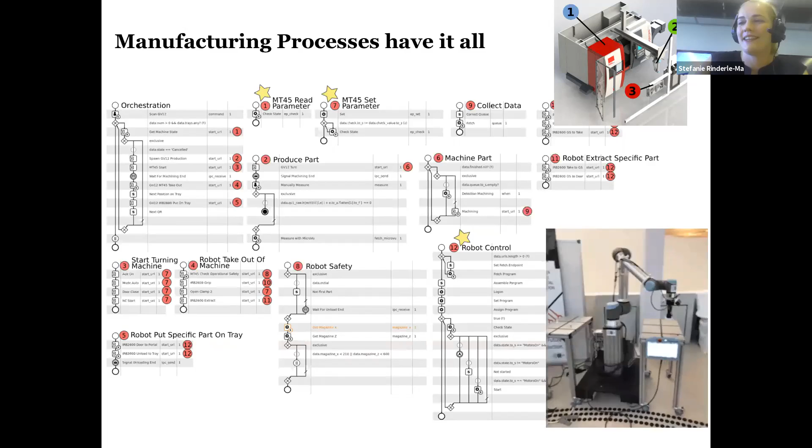So let me start with a real world case to illustrate what we mean by manufacturing processes. This first scenario is a robot that interacts with a machine. These are real world robots and machines. They are situated at the so-called pilot factory, a factory located here in Vienna. And we can use and play around with this factory as scientific partner of the Austrian Center for Digital Production. But it's real world because you can also produce real world parts here.

And what you can see here on the left-hand side is the process, which is then driving the robot interacting with the machine. So let me start the video.

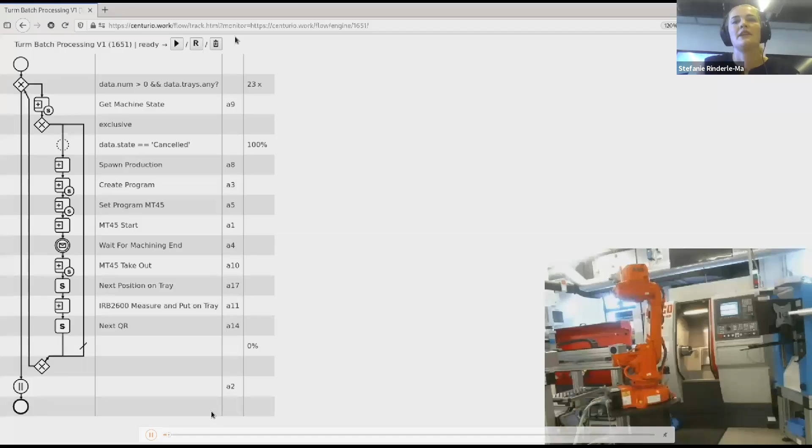So as I said before, you can see on the left-hand side the process. That's, let's say, the super process that drives the entire interaction. And now you can already see by the animation, so it's not only animation, it's already execution, that different tasks are executed and sub-processes of the super process are spawned.

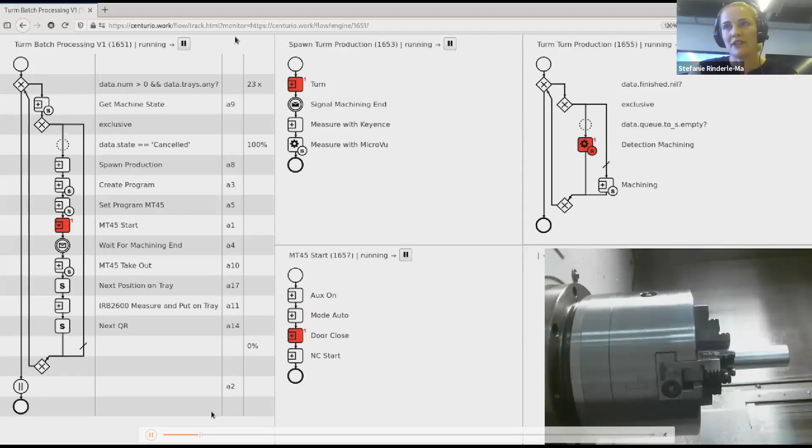And on the right bottom, you can see the machine with the workpiece. What we actually want to produce is a chess tower. So you can see now the raw material, and the process is really driving now the machine. So it starts to turn, and we can see that already the processing of the parts starts.

So in the first step, there's more raw processing where you cut the raw shape of the tower, which we can see here. And in the process, you can see, okay, the super process is in a state wait for machining to end. And the sub process is active. So the turning of the machine is executed here. So you can see how the shape of this tower develops.

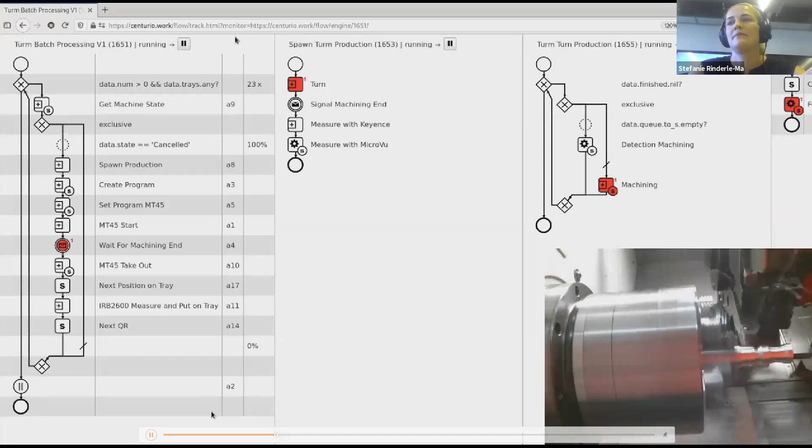And we took here also some little pauses and slower movements to see everything and to also see what is happening in the process. Okay. So now the more fine-grained processing of the tower starts. And I'm really fascinated by this because this is how really something is happening here.

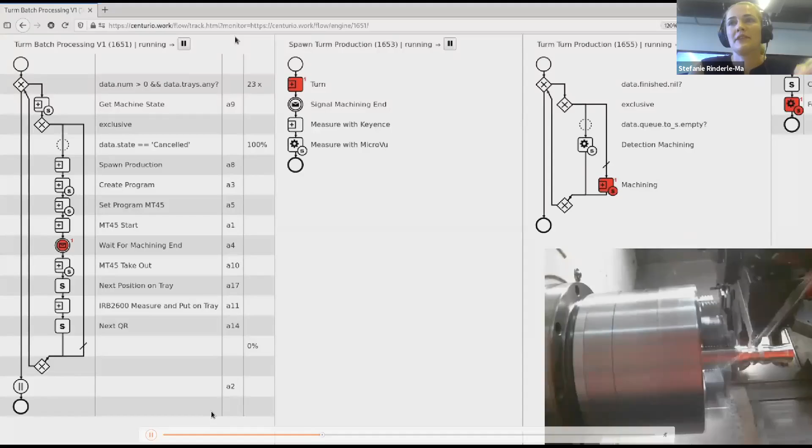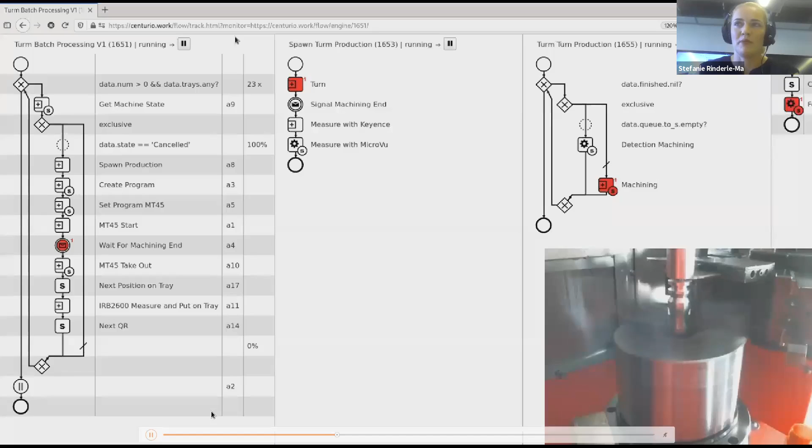And what we have to do is that from the process, of course, we have to connect to the machine. And this also, for example, is a lot of work in implementing all these protocols, how you can really access the machines. For example, there are standard protocols like OPC-UA, but of course you have to manage to connect really these physical devices to the process.

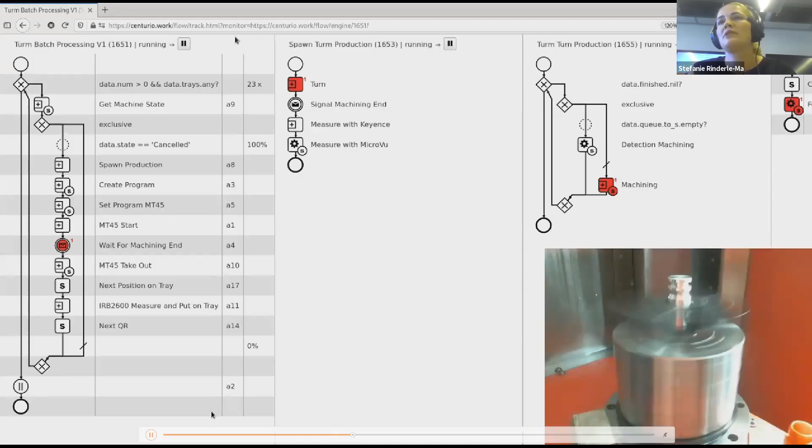Here it's a different view now, it's from the top, so that we can see better what happens. And now the tower is already cut, and roughly at this stage, it's finished. So you can see these machining sub-processes stopped now and disappeared because they were completed.

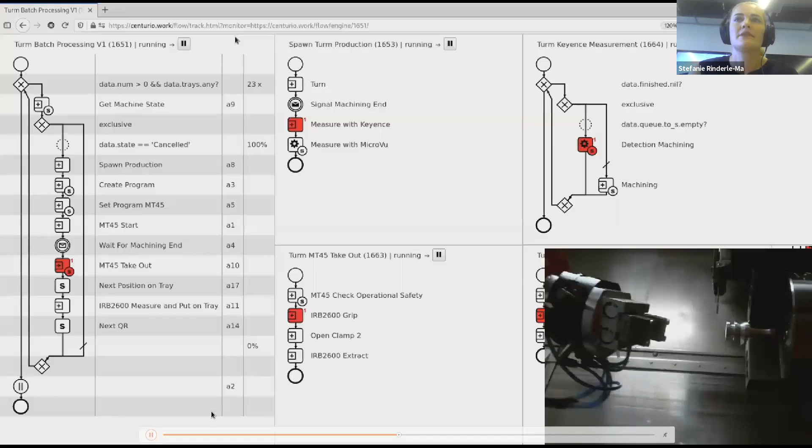And now there are two measurement steps in this process. So for quality control, we not only have to produce the part, but also we have to see whether or not the quality is sufficient. And there's two ways here to measure the tower that we have produced. One is with scanning the part. This is the first one here, measure with Keyence.

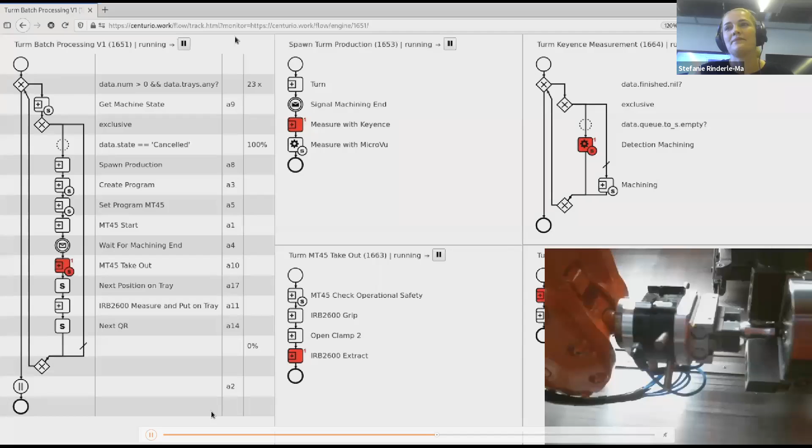And for measuring the part, the robot has to take out the part from the machine. So this is now one of the sub-processes here, the lower one where we can see take out, and now the gripping of the part. And it's a little bit slower than in reality so that we can see everything happening again. And now the extraction starts. Yes, now we see the extraction.

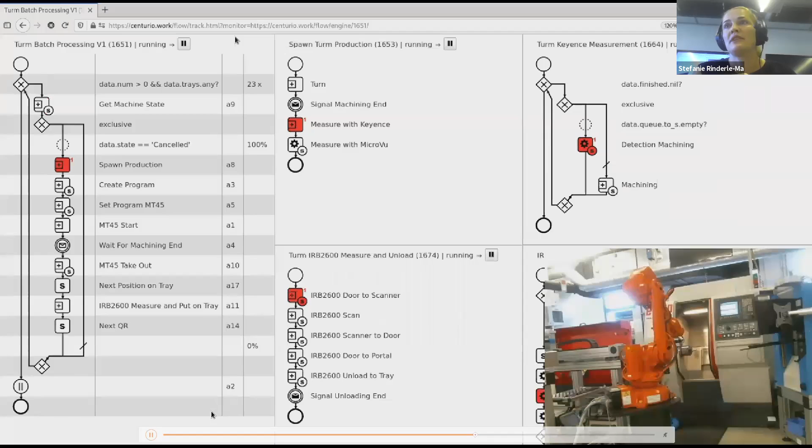And what is a very important point is that during all these steps, let's say the machining before, taking out the part, and now the measuring, the process also in parallel collects all the necessary data connected with these tasks. So for the machining, for example, there could be different data interesting, the power consumption of the machine, for example. And then, of course, with the measuring tasks, there's also a lot of interesting data measured.

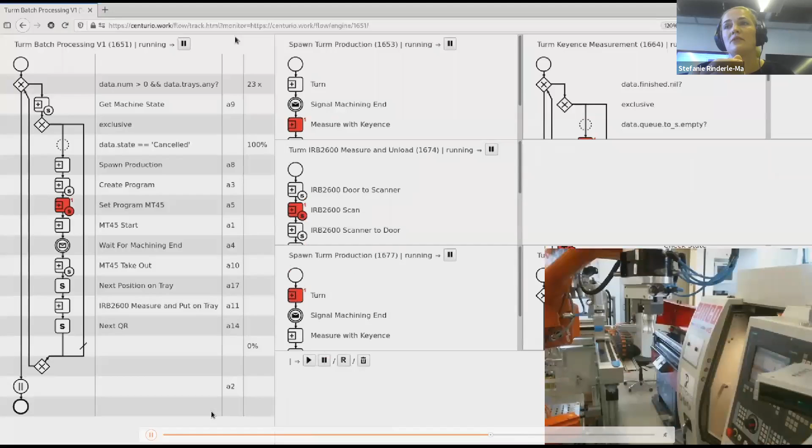So now we can see that the robot puts this into this scanning device. And by this integration by the process, now it becomes possible that all of this data is connected together in a process-oriented way. And that's really new, because so far, if you go to real-world factories, often the data is collected more in an isolated manner, let's say per machine. So they have data silos.

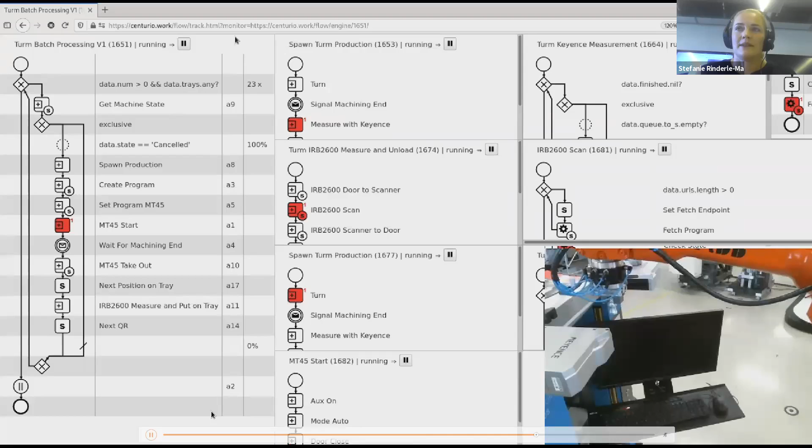Maybe I can measure all the data connected with the production machine. I can measure all the data maybe with the follow-up workstation, but this connection is missing. And I think here an entirely new door opens for data collection and analysis. We can see here now the scanning of the part and so on. Maybe I will go to the end of the video because it takes now some time.

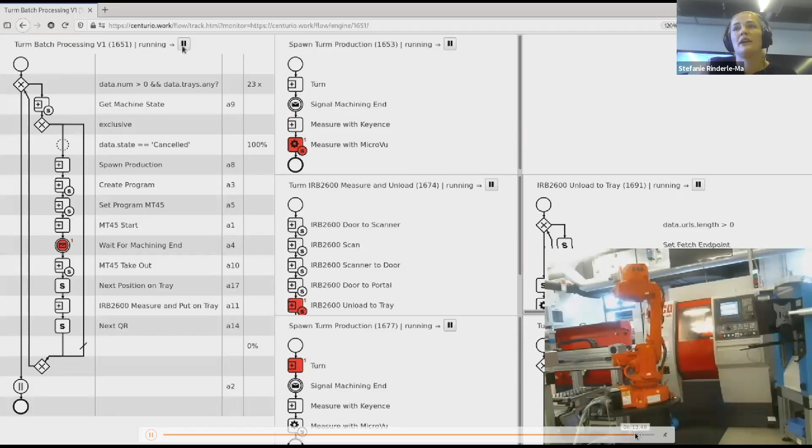So then the second step, the second measuring, would take place here. And as I said before, we then have at the process level the data of both measurements at hand and can, for example, compare both measurements within the process. And then, for example, if we see that there is maybe some problem with the part, we can look back into the data that we have collected with the machining and then see, maybe from sensor data that was collected, that there were already some drifts or something happening in the sensor data.

And this is so interesting. So this is, I think, one of the benefits of such a solution: not only to execute such processes, but this data collection part. And I think this is also a little bit in line with what we heard this morning in the keynote. So we have now the process data, the event-based data, which we can do process mining with, but we also have all this additional data like sensor data and so on, where we can then combine this with, for example, machine learning methods.

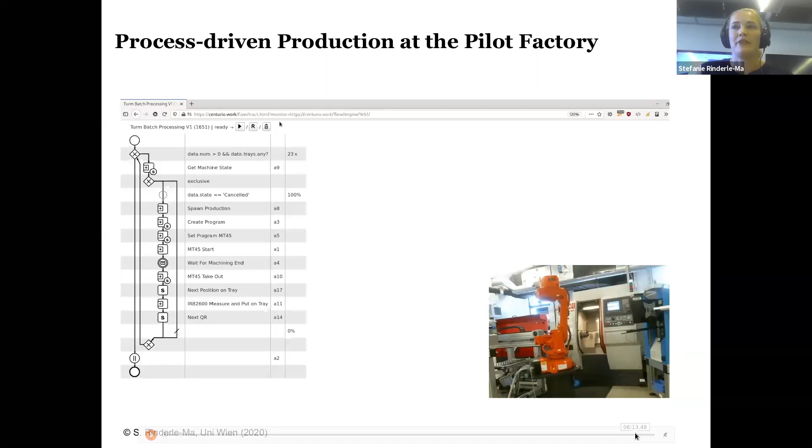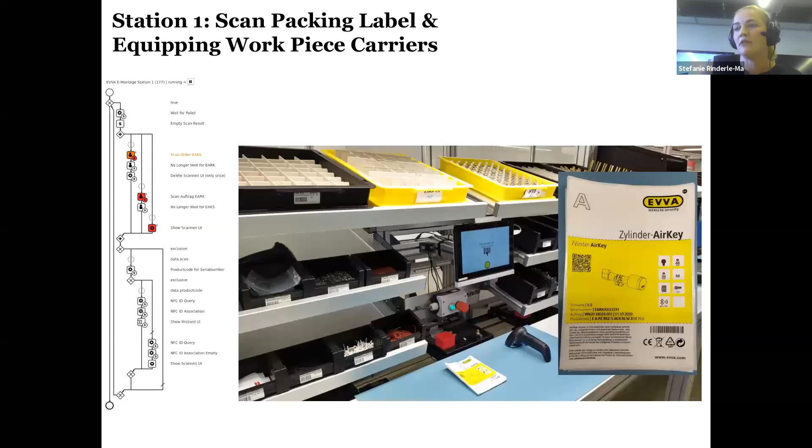And then at the next workstations, and here we can see this inclusion of the human, the process can also be used to give instructions to the workers for the specific task they are doing. You can see here on the user interface, and please keep in mind that we have all these variants, so not all the instructions are the same for this task, but depend on the variant that is currently produced. The workers can be guided by these instructions. And this is a huge benefit because so far they have worked with paper-based documentation. So I don't know how many pages, but it was several hundred pages of documentation that had to be consulted for the steps. And a solution like this is, of course, much more informative and quicker to consult.

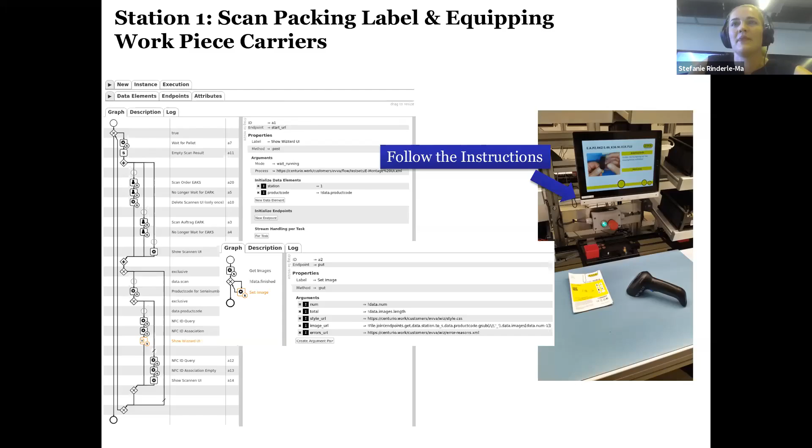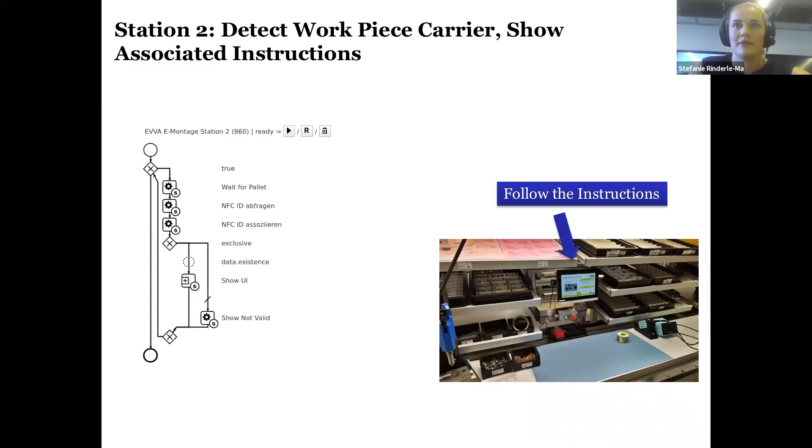This is the next workstation here, where again instructions are presented. And as I said before, first of all, this leads to a reduction, of course, of complexity and effort. And also, as we learned in the current situation of crisis, there's a demand, for example, for companies where staff or teams change more often. And here, of course, new workers that have to be instructed can be more easily integrated into the process as well. Right, so these were two examples: one more on the automated side of the spectrum, and one including human workers.

So are there any questions regarding these two examples at the moment? I think you're fine. Okay, right.

So a first key message, for us looking at this domain now for almost 10 years, is that process technology can really help to drive digitalization for manufacturing processes. I have to say that, of course, production and manufacturing is already a highly digitalized environment. There's a lot going on, what the robots can do and so on and so forth. Where we think processes come into the game is really in this integration part, and also in this data collection and providing new ways of analysis on the production side.

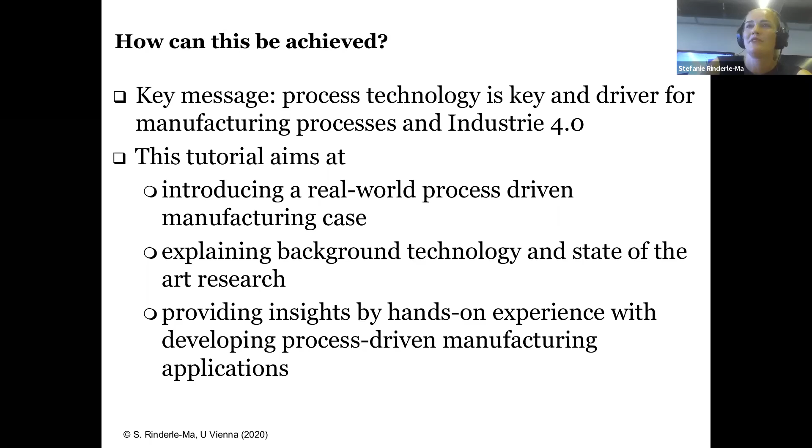So what we have already seen, we have seen two real-world examples for such manufacturing processes, an automated one and one including human workers. In the next slides, I want to introduce a little bit the background technology and state of the art, because it's not only an application-oriented question or research, but it also connects to many, many interesting fundamental research questions. And then in the end, we want to provide some insights by a hands-on experience where we developed the scenario mentioned in the beginning.

So I try to give an overview about the research areas that are necessary to be understood to develop such manufacturing solutions. And I don't claim that this is a comprehensive or complete picture, but these are some of the areas that are touched and where state-of-the-art research is also currently going on. So let's say the outer side, I definitely think that the problem sits at the interface of BPM and IoT, obviously. Then with this data collection and analysis part, we have, of course, questions how to analyze and visualize the data.

Then, as also mentioned by Hajo in the beginning, I'm always interested in change and adaptation of processes. And this is also really necessary in this domain because exceptions can happen at any time. And where currently in some situations there is one expert listening to the machine and hears maybe that there might be a problem at some certain time coming up, we think it would be more structured and more sustainable to analyze the process and maybe predict this problem from the data that we have, and then also be able to suggest and apply adaptations and repair actions.

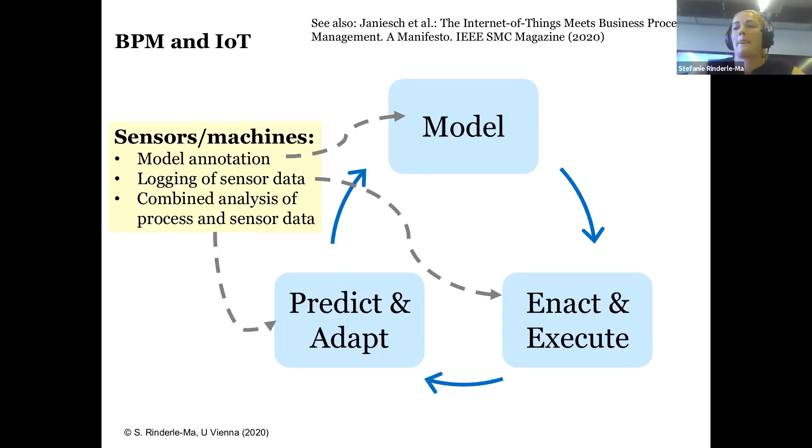And then this, of course, plays into the execution part where the sensor data is actually collected. And then in the prediction and adaptation phase, how we can analyze both the process and the sensor data in combination. Then humans, also a very important factor here. With the modeling part, we could, for example, think about, do we have manual or automatic tasks? Then what is also from our experience in practice a huge topic is worker assistance. So in the one example from EVVA, we have seen that this guidance or instructions are really helpful

and necessary in practice. And then if we think about adaptations of processes, we not only have to make sure that adaptations are correctly applied, but also we have to support users in defining the adaptations. And this is often also a huge challenge because maybe the expert can hear that the machine will run into some not so great state, but what to do to the process afterwards is maybe another question. So here we talk about support of domain experts, who are not necessarily the same as the process experts. So it would be also nice to see from the data, from the prediction, what kind of process evolution or adaptation will be necessary afterwards.

It is nice, Steffi, that this is also a human in the loop aspect, of course. Yes, yes. And I had this before the keynote already on slides.

It was no ad hoc adaptation afterwards, so I think it's a really important aspect. It's important that we talk about it, because one of the fears connected with introducing these processes is that all the work will be automated and there will be no work left for human workers. So I think it's important to say the work may change a bit, but the main goal is support at this stage, for acceptance. This is very essential, because if you have hurdles where people in the organization don't want process management, that's a bad start right away.

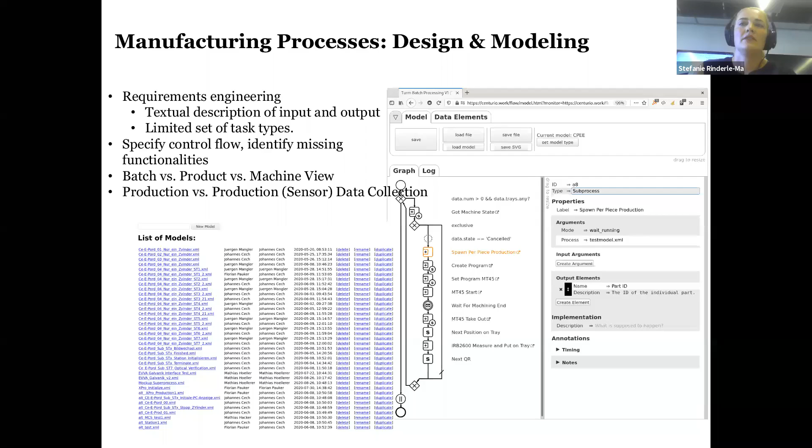So what we have seen is the manufacturing process design. I want to distinguish between two phases in the design. One is the modeling. Here we want to offer users, along their mental map, standard modeling notations like BPMN. You can see the interface of the solution we developed - you can model along BPMN, or import BPMN models you've already made. You also have a repository of models you may have specified before and just want to adapt and use later. Then all these other questions come into place, like where are tasks where I can use sensor data.

The second phase is the execution design, because we have to be aware that the models are becoming programs that are executed. So it's definitely not no-code, but let's say low-code plus this model-based approach that we use here.

But there's no free lunch, let's say. If we have modeled the process, we also have to define, for example, how to connect the machines, how to connect the sensors. Here we have to deal with all these protocols I've mentioned before. But we also have to see what happens if there's no response from the machine, or only a partial response - how to handle problems and so on. This is, I think, a very structured and usable approach towards having a really executable program. But this information has to be provided at some place to be able to execute something.

What can be offered here is step-by-step testing. We can use, for example, testing or dummy services, so you can see how the process executes before you really connect the machines and sensors and something is actually done. This is, let's say, beyond model checking and simulation. This test mode can be interesting before you go to the real world and use, I don't know, the one million dollar material or something.

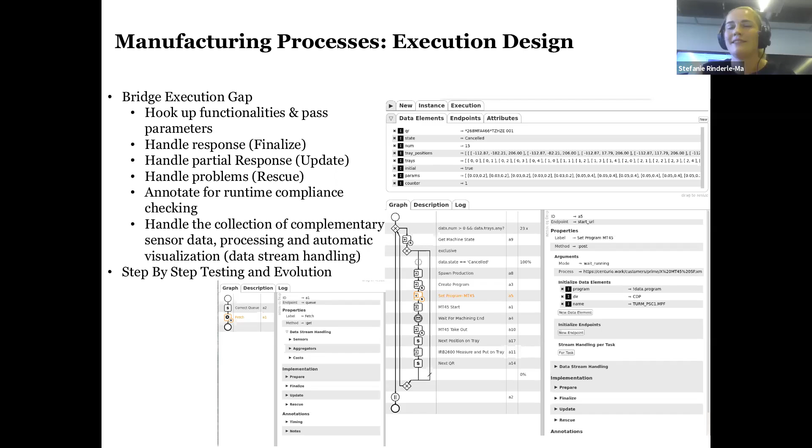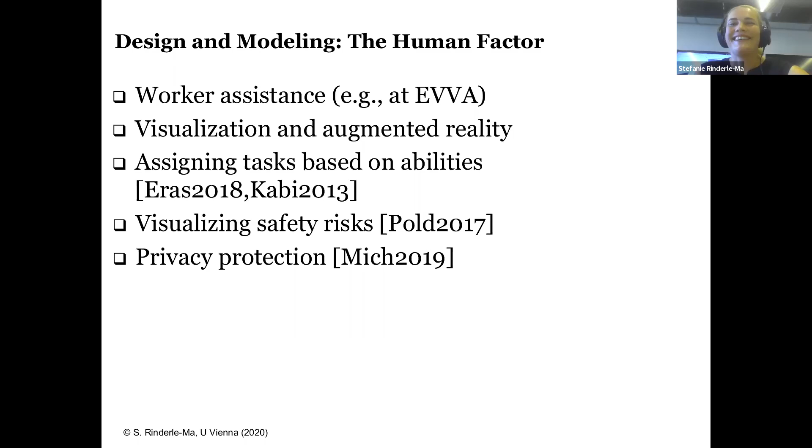Then what's also a huge issue in manufacturing is safety, because a robot, if it's programmed to do something, it will do it regardless of whether there's an arm or a leg in between. So safety is really a huge issue. For users working with the process, we could also use it to visualize safety risks, for example. Privacy is also a concern, and there's ongoing work here. So people are thinking about design, and this human-centered design of manufacturing processes - there's still many things to do in this direction.

Yeah, the second part is the part which I also regard as highly interesting. The keynote this morning was also about process data used for process mining and sensor data, then maybe more with the machine learning approaches. I think here is one of these exciting areas where you can really have both of this data to be analyzed.

Hayo, you wanted to ask something? No? Okay, sorry, I was checking whether there were questions and then I pushed something. Okay, sorry, yeah, it was.

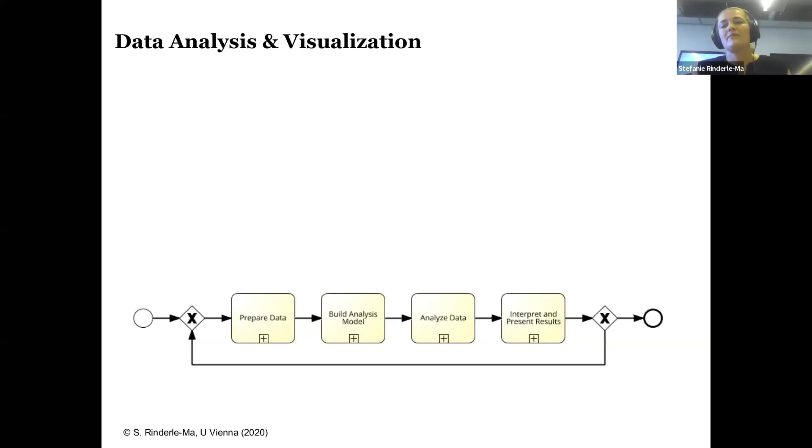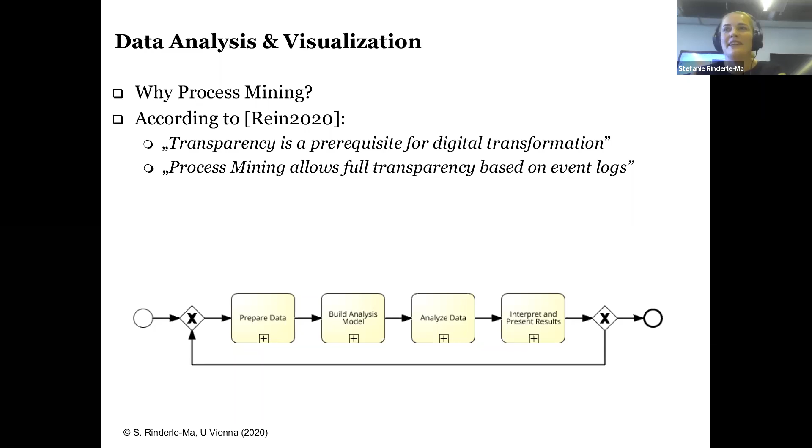Right, let me go a little bit deeper into this. For the data analysis and visualization part, I think this was also a question nicely referred to in this morning's keynote: what does process mining do? In a very recent book on process mining in practice, I found two statements I can really relate to. We talk about digital transformation, and it's stated that transparency is a prerequisite for digital transformation, and that process mining is the enabler of having full transparency on the event logs. I think this is quite true. Process mining in general is also very interesting for the manufacturing domain. I don't want to go into process mining here, there are textbooks, as Avi said this morning as well. But what I want to comment on is the combination of process mining with sensor data.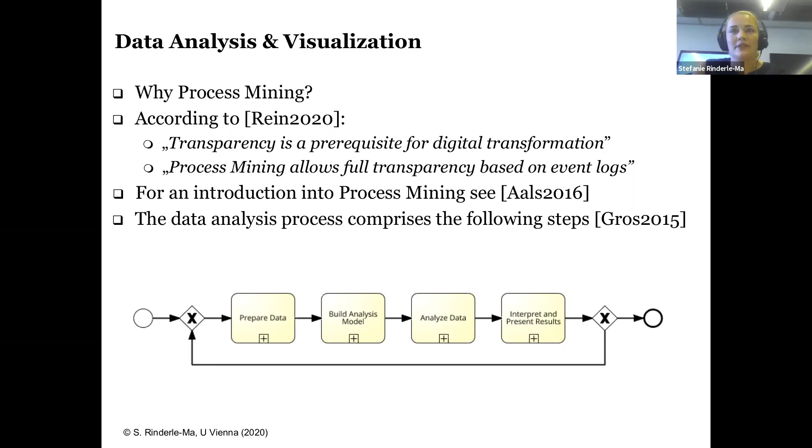Let me first go into the data part. In an analysis project, first, and this is often the most expensive part of such a project, you have to find, collect, and prepare the data. It's a very good question how to bring together the process data with the sensor data.

For the process data, we have questions. Okay, we have event-based data, sure, but then a question is: what about the lifecycle? What lifecycle states do you support in collecting the event data? When you look at logs, sometimes there's a completion event, but for interacting with machines, sometimes it would be better to also have a corresponding start event, because sometimes the machine gets stuck somewhere within the execution, and then you won't have a completion event. It would be good to have the start event to relate to this too. Even more lifecycle events would be even better. So this is one claim we would make: that you collect your process data with a sufficient distinction of lifecycle states.

Then sensor machine data is highly interesting, and this is often collected in the form of time series data. So we have, let's say, temperature or pressure, or we can also have power consumption, which is then measured continuously over time. Then the question is how to bring this together with the event data.

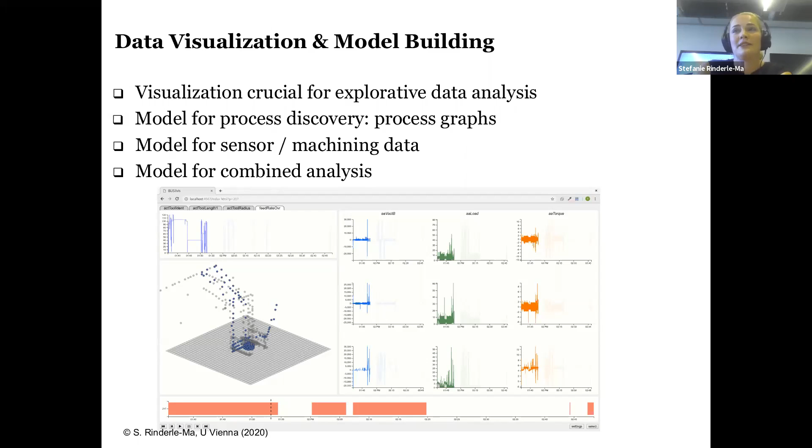Still, I think it's also interesting to look a little bit more into models to visualize both the process data and the sensor data. This is also hand in hand with how to collect the data, but the visualization might be even more interesting. So if you have multiple time series per task, how can you do that in an informative way.

And then, commenting on the analysis: what we actually want to do now is use process mining, but include data. This is no new idea - this has been followed for many years, the general question of how to include data in process mining. For example, there was all this work on decision discovery, where based on process data, you want to discover the rules behind decisions, alternative branchings in the process. Or if you look at conformance checking, there's also work on taking several perspectives, including the data perspective, into account.

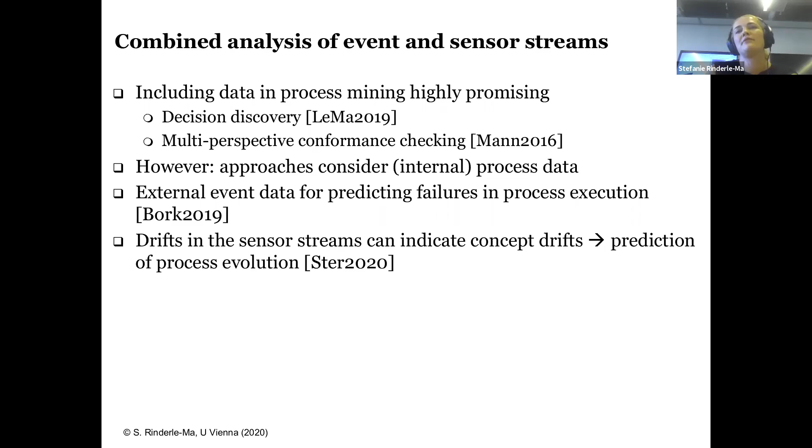Mostly these approaches consider more the internal process data, if I might call it like this. External process data has started to be considered - for example, there's some work where external data is used for predicting failures in process executions. We want to move, because the experts say this would be really interesting, towards explaining drifts in the process execution by drifts that we observe in the sensor streams. And of course, one of the problems is to select the right sensors that really explain the behavior, and there are many other questions here.

And also for conformance checking, this could be interesting, because we could base the costs of deviations, which conformance checking takes into consideration, also on the data that we observe.

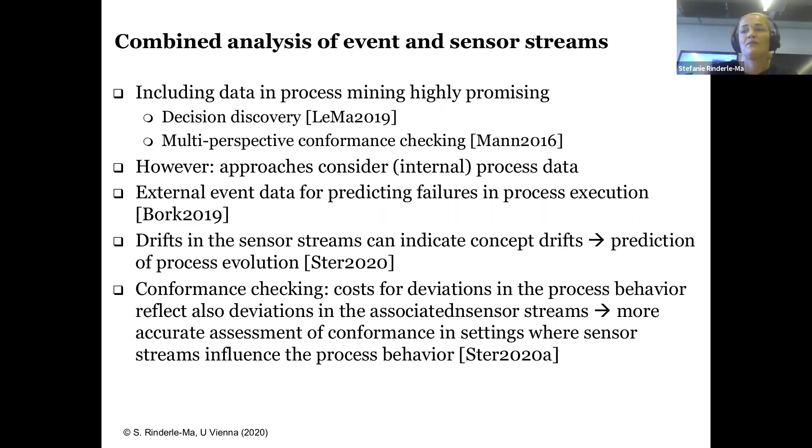And then finally, let me comment a little bit on runtime adaptation and repair. There's a whole body of work on process change. There are also books on it. So this has been a very relevant line of research for many years now. I think it has also gained some momentum nowadays again, because all of our processes were very disruptively changed recently.

The line of research has dealt with many aspects. I think one of the prominent ones was that you cannot conduct change however and whenever you want, but you have to deal with correctness issues to not run into problems afterwards. And there were also first works to deal with how you can find the right change for, let's say, an exceptional situation.

And we also observe this in the manufacturing domain. There can always be errors due to many sources, many reasons. There can be errors right away, something is going wrong. And there could also be, for example, rare cases. This is of course not really an error, but it also might lead to something that you won't expect. And for different reasons, you would want to modify the process, even during its runtime. I think this is so important to mention.

You can, of course, also go and model a new process and start it over again, but often this is not possible. So changing a process is changing a running program, and this has to be done carefully. What would be good is to at least be able to start and stop instances whenever it has to take place, but also, for example, change the thread of control, skip some steps, or even insert some tasks. All of these operations are really important, but have to be handled with care to avoid any side effects afterwards.

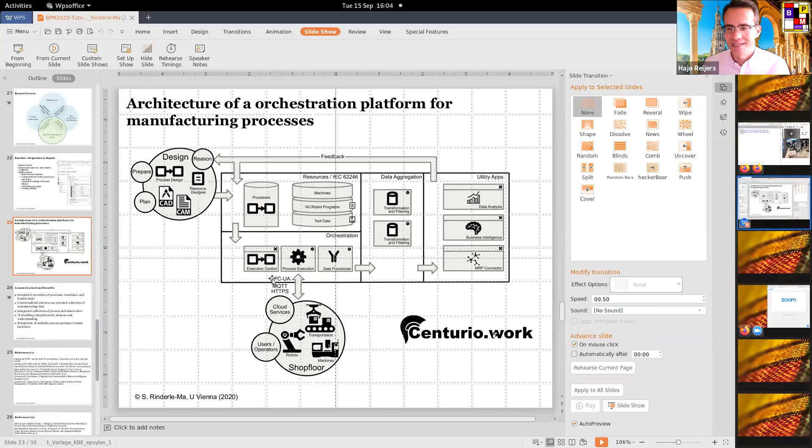By the way, maybe it's a good time to give Felix the opportunity. Felix, one moment. Now it's perfect. It's gone. Can you speak now, Stefanie, to make sure that we can hear you? Is it better? Yes, there is no background noise. We hear you very faintly. Better? Yes, perfect. Thank you so much. I have very capable team members. Very good. I'm going to give Felix the opportunity to ask you a question. Go ahead, Felix. Can you hear me? Yes, I can hear you.

Very good. Thanks for the nice introduction to process support for manufacturing. I wonder, and maybe I missed this because it's quite warm here where I am, how data quality plays into this, because my experience doing some projects in the manufacturing domain was that we always tried to do some analysis, and it turned out you cannot really use any of the stuff that they record.

Yes, very good point. I think I very implicitly touched upon this by saying that the data preparation part is the most expensive one of most of these projects, because as you say, you can start doing something and then in the end you can throw away everything because the data quality is so low.

So I experienced this very much in the medical domain, for example, where we had even handwritten logs or Excel sheets which were called a database and so on and so forth, particularly if you have heterogeneous data sources and have to bring everything together.

So for the manufacturing domain, what I presented now is that we already collect the data in the way we want to collect it, because we drive this with the process engine and we run all the processes ourselves and provide the opportunity to collect the data in a contextualized way in the quality that we want to achieve. But I totally agree, data quality is a huge problem. And as I said before, in the medical domain, we even had to go all the way to recollect the data. So it was not usable at this point.

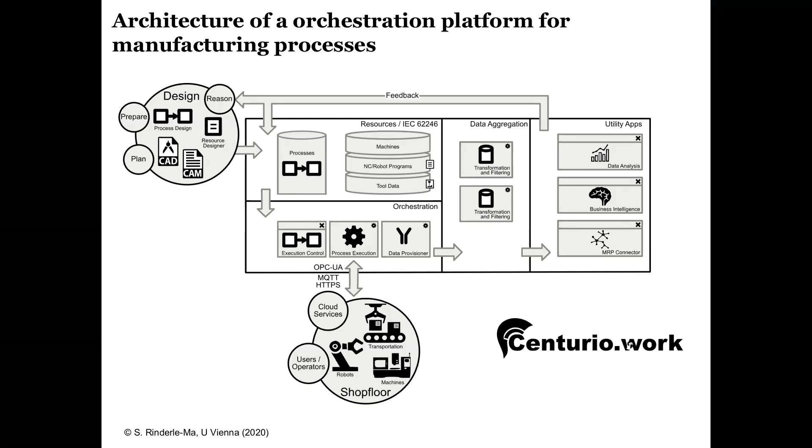Yeah, thanks. I just wondered. Sure, yeah. Very good. Thank you. So I'd say in the interest of time, okay. Proceed. Okay, great. Thank you very much for the very nice questions.

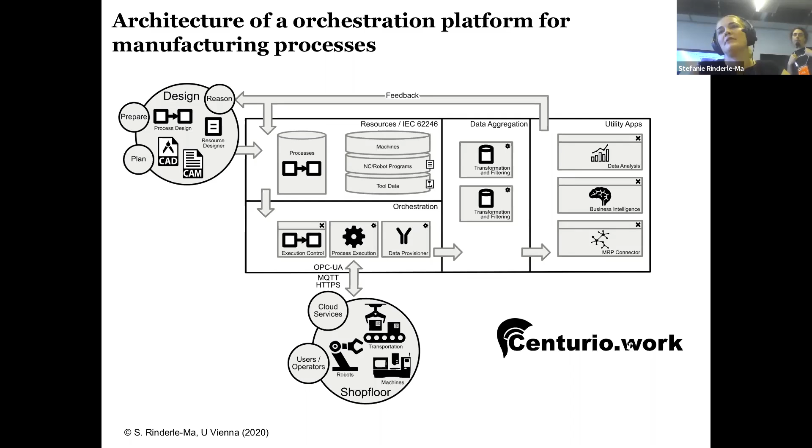Then this would be an architecture for such a system. And maybe what is interesting is the design part. You not only have the process designs, but you have also the designs for the products, so all these technical drawings, which you have to also consider. And at the runtime part, you have these connections to the physical devices via protocols, OPC UA and MQTT. And then of course this data part, which we will now also comment on in the demo.

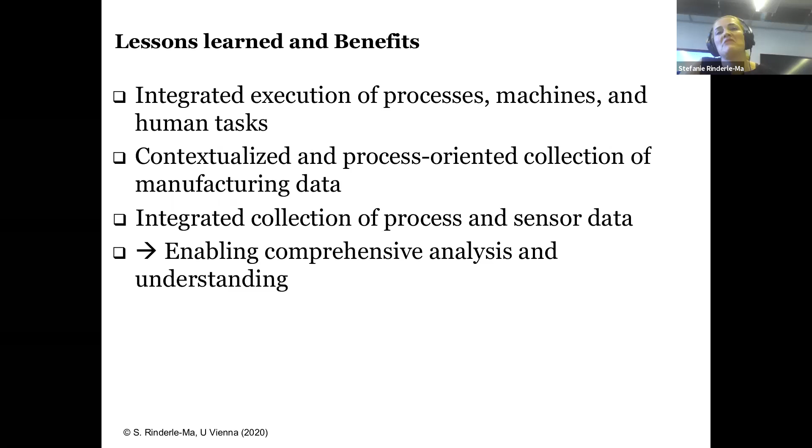So maybe I just summarize at this moment the lessons learned and benefits before going into the hands-on session, so that we don't miss this. What I think is the great thing about the manufacturing domain is that we have the integrated execution of everything: processes, machines, human tasks, information systems, and so on. And the huge benefit of implementing a process-oriented solution is that you can collect the manufacturing data already in a contextualized and process-oriented way. This enables the integrated collection of process and sensor data, and in turn a more comprehensive analysis and the transparency that we talked about in the beginning, which is such an important aspect of digitalization.

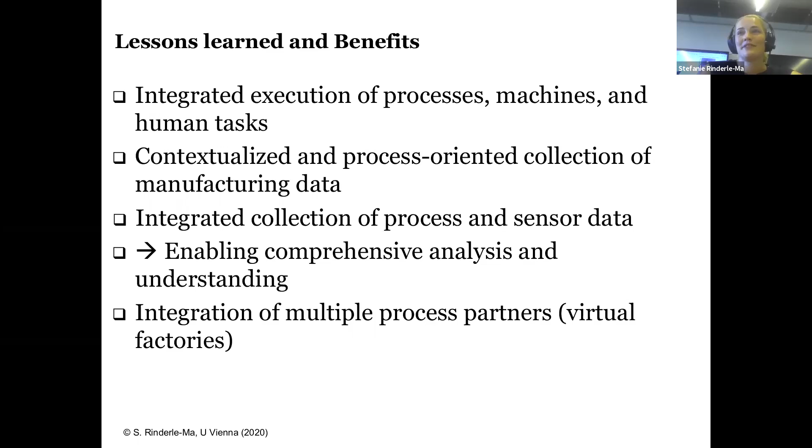And as a more future point, which is always a huge selling factor for project funding, is that you want to go outside your company. So with processes, you can also form process networks with multiple partners, under the buzzword of virtual factories. We had an entire EU project on this. But in reality, we are not yet there, but I think we have to keep this in mind, because this is a very interesting way to go.

There are some references and of course some thanks. So Jürgen will now do the demo and show the hands-on experience, and Florian is working with EFA and provided these nice slides on the use case at the EFA company. Right, now let's go into the scenario and we will start with a demo.

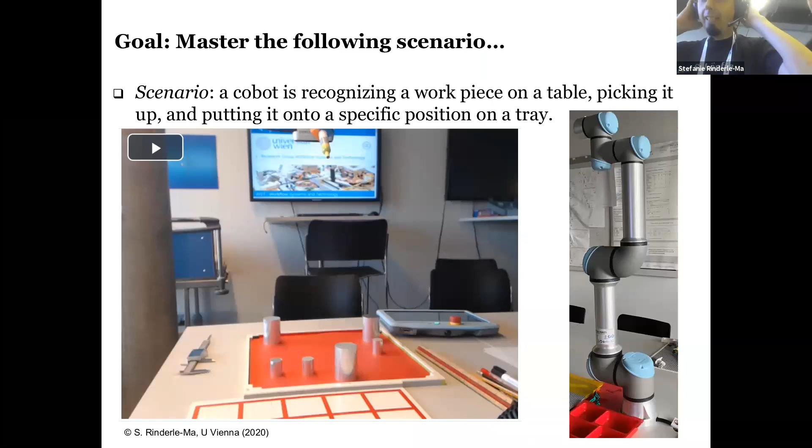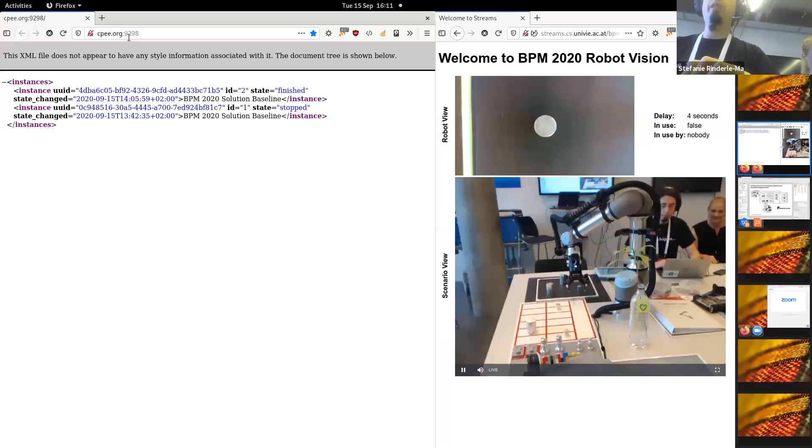I switched to the other view that you can see here. For today's demo scenario, we will use the robot in our lab. You should now see on the right-hand side two different camera streams; the robot view is the upper camera stream. The camera stream has a delay of about 4 seconds because we have to take the picture and internally work on it, for example, analyze it by neural networks. So there is a little bit of a delay.

So when I put my hand below the camera, you can see me move away from the stream in the Zoom, and about 4 seconds later, you should see my hand appear under the camera. You can also see the total view of the lab on the lower end. So you can see myself and Stephanie, but a little bit later because of the camera delay. And here is the setting.

This is a Universal Robot 5; the 5 stands for the fact that it can handle up to 5 kilograms. If it's stretched out, it's about 1.5 meters wide. This is the control panel of the robot, where you can typically do all the programming. And the scenario, as you see it here, is basically a work organization scenario.

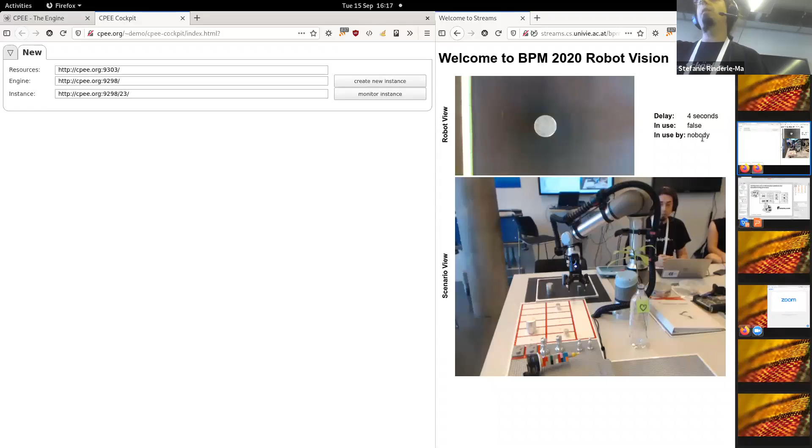So as potentially many people in this online meeting will now use the robot, I put in this view so that we can see who actually currently uses the robot, and we have this rule engine hooked up to the process engine, which actually protects the robot from being used by multiple sources. So you can always see, if you give the process instance your own name, which person actually currently uses the robot, so that we can cheer for him or whatever we do when he does something good or bad with the robot.

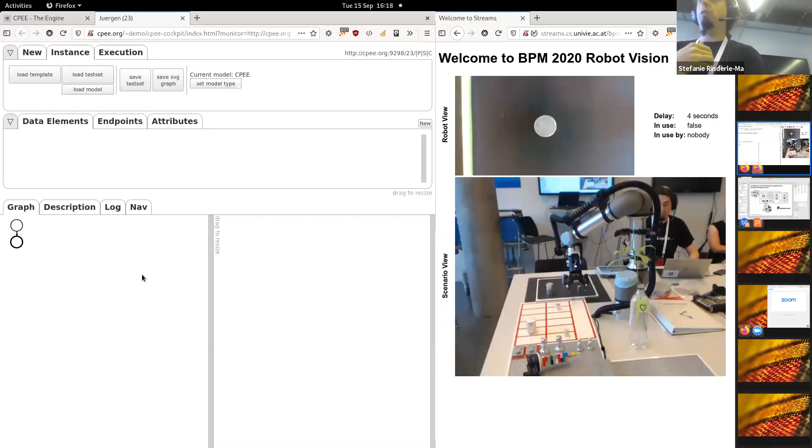Okay. So I created this instance number 23, which you can still see up here, and you come into our modeling view. In contrast to, for example, Signavio, we are not using a manual layout, but this is an automatic layout editor, which we use because of feedback by our customers. There is a strong desire that when two people model the same thing, the result actually looks the same. And also we can do funny reformatting of the processes in the automatic layout format, so that it's easier for bigger groups of people to work on the same processes.

So for the first step, I'm using this load template button. I can make it a little bit bigger if you want. So the general layout is, we have this new that we were before. We have this instance where you can see operations that you can do on the instance. You can, by the way, import Signavio models if you want, but of course there is always, after the modeling, the execution gap where you have to add in certain things so that it becomes executable. There's this execution tab where you can start the execution.

And then we have data elements, endpoints, and attributes. In the attributes, you can see in the info my name. Here you can change your name so that it shows up over here when we execute. And we have some other information like the model type and the theme and stuff like that. Currently, we don't have many endpoints to use. Currently, we don't have any data elements.

So I'm now loading the BPM 2020 template. On the surface, nothing changed, but we now have a whole lot of endpoints which are connected to the robot. So it's a total of about 11 endpoints, and these can be used to talk to the robot. Another thing that you can see here under attributes is that we have another attribute which is called resource, and here it says UR51 because we have two Universal Robots and they are identified as UR51 and UR52. This resource attribute actually helps the rule engine protect this instance.

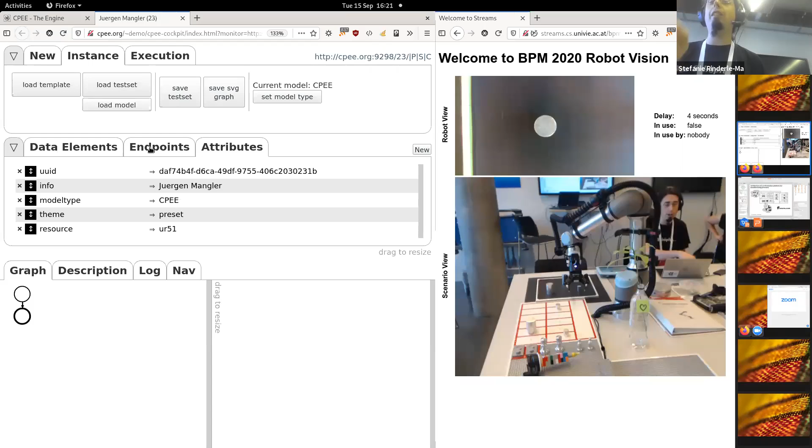If a single instance has this annotation, only one of these instances which has this resource UR51 in it can run. So don't play with this one, leave it in, or else two people can start the robot simultaneously, which will lead to interesting behavior.

The robot itself operates on a proprietary protocol, which we encapsulate by a protocol called OPC UA, which is widely hyped and available in the industrial realm. And for the purpose of this demonstration, I wrapped all these OPC UA calls into these REST service calls, which can be used here in the process.

So the first step, as you can see in this picture, we are now looking at an individual little piece that I put on this black paper. I move it away a little bit. So the first step of the modeling is that we want to insert a task where we move into some kind of overview position, where we can see the big picture and actually determine if there are any parts on the workspace. So the manual modeling works like this.

You start with a start and an end symbol, a BPMN start and an end symbol, and you insert at this position certain things that you know from BPMN. So it's not possible here to produce any models which are not valid, so they are always syntactically correct. Of course, the semantics is the problem and not the syntax, but here everything that you produce is syntactically correct,

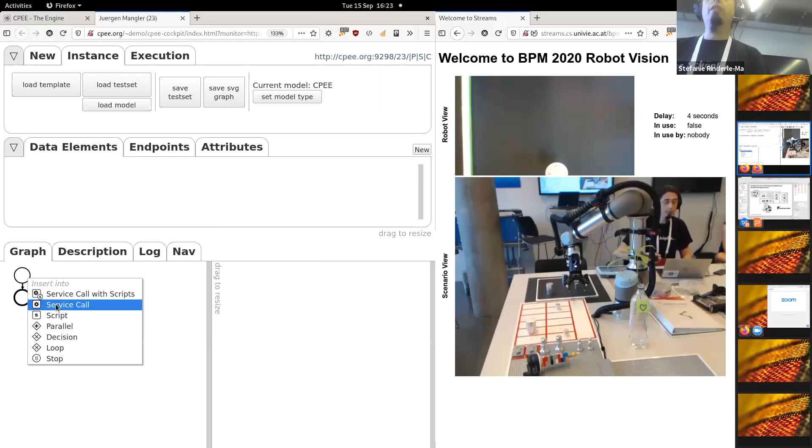and there is service call with scripts and service call. The one is just call an endpoint, and the other one is call an endpoint and work on the return value. So for simplicity, we just introduce a service call. Remember, we are in the instance number 23. We have a quick look at the endpoints, and we have our simplified editor with no fancy bells and whistles.

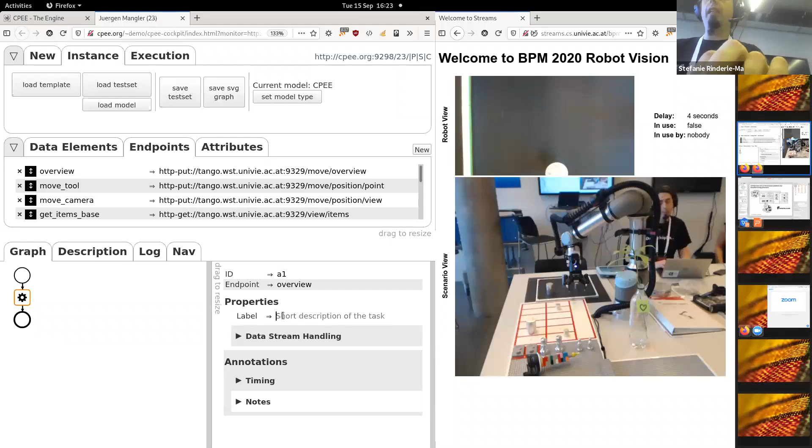We just write the overview in here, and you can see the parameter sheet here has changed a little bit, and we also give it a label. We call it move to overview. And the editor shows it. As you can see in our editor, we show labels not on the task, but beside it, which is much better for automatic layout, because if you put the labels into the tasks, the layout becomes quite difficult. So we are concentrating on these labels on the side.

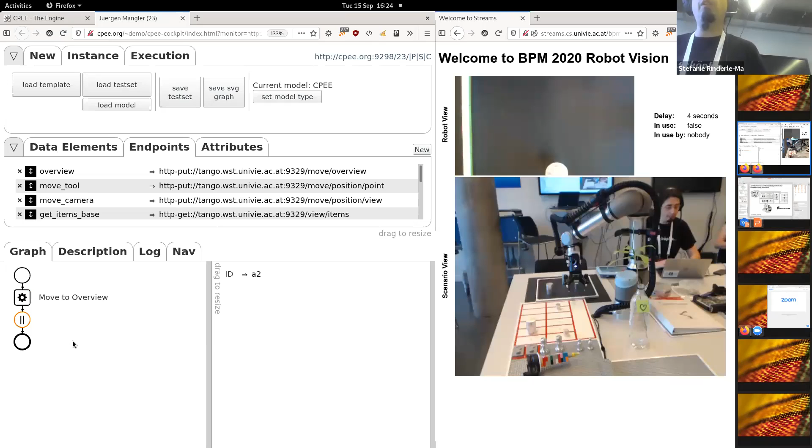And I do another thing, I insert a stop event after the move to overview, because of course I want to play around with it and I want to start this process. So nobody uses it, and so I will start this process, and about 4 seconds later you should see the robot move and the camera move. So we have gone into this overview position now.

Yeah. So, Jürgen, may I? Yes. Very shortly, it's just to give you an update that there is approximately 10 minutes left in the tutorial. Okay, 10 minutes left in the tutorial. Okay, so I'm.

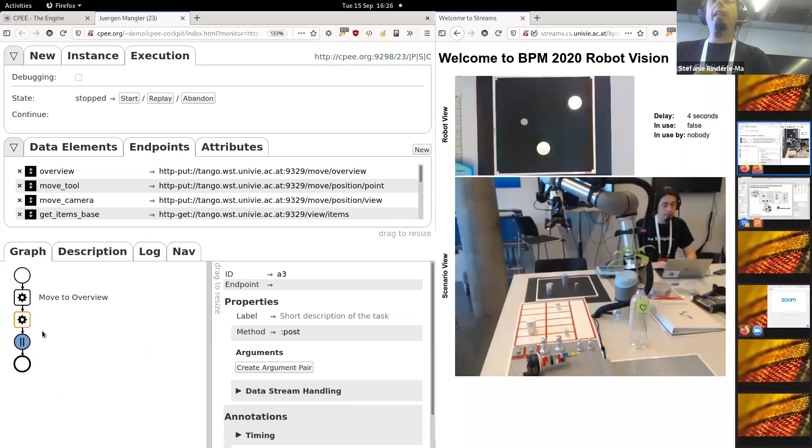I move to overview, and here you can see that, of course, I have to compensate for the camera delay. So I insert another task, and this time I use one of the endpoints, which is called wait. And here you can see as soon as I inserted the endpoint, the icon switched. So that's another way that we approach things. We have functionalities, and annotated at the functionalities, there is the meaning of the functionalities. So we don't see the modeling as you put the model there and then afterwards you hook up the functionalities, but actually the functionalities define what a task does.

Because of all the arguments that you can give it, in this case we can say we wait for 5 seconds or something just to be sure. Just to minimize the ways that you can make errors, we are basically supplying every endpoint, also the ones that are not on our service, can be annotated with annotations. When you look up here, there is this resources, and here the annotation service is running. And whenever you insert an endpoint, it is looking up if there are any annotations available for this endpoint.

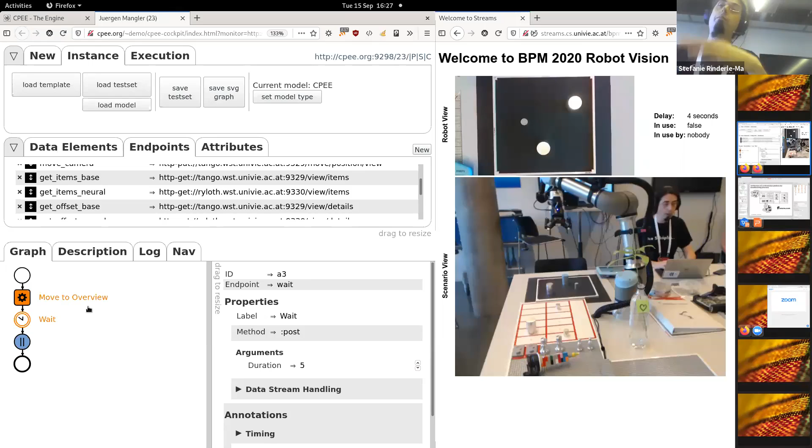So I would now go on and model everything, but of course I prepared one process where we can see what actually happens here, and if I close this a little bit so that we can see the full thing. Here you can see how the finished result looks like.

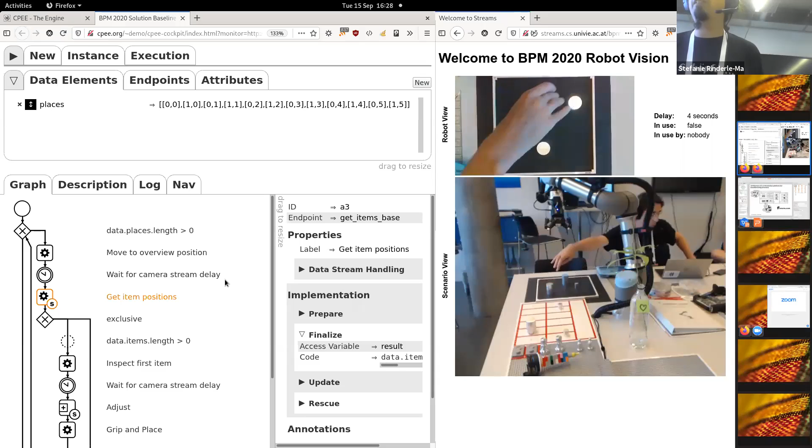So we also have some data elements here, because the red and white panel in the back can be steered by coordinates. So this is 0, 0, and this is 0, 1, and this is 1, 0, and this is 1, 1. So you can yourself decide on which of these squares you want to put one of the parts. So there is no millimeter-based steering for the back thing, but only places that you can put stuff on.

So these are the available places. If you want to put 2 things on the same place, you can of course do this.

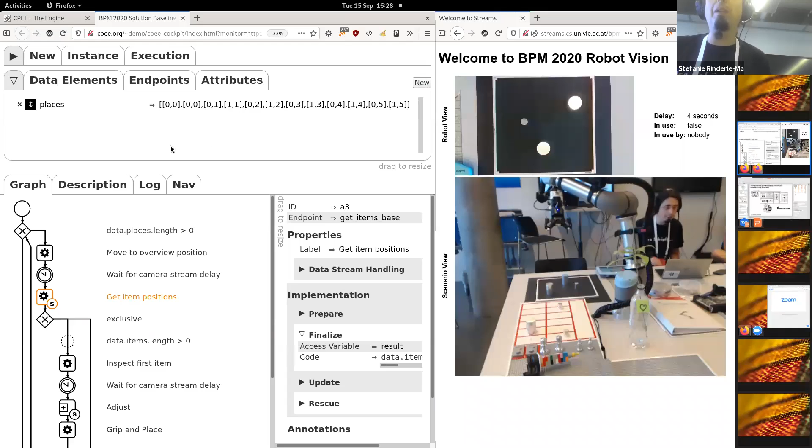Let's do interesting things. So we put 2 things on the first space. We move into overview position, as you have seen. We wait a little bit, and then we get the item positions. And of course we can explore everything.

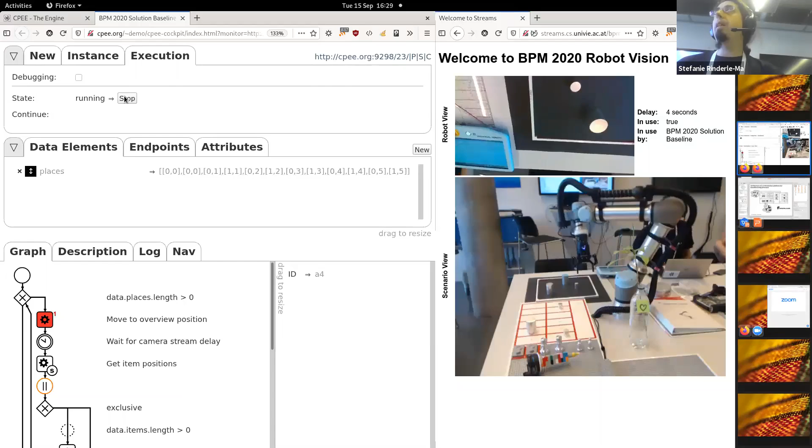Let's continue from this overview position. If I start from here, we should move back down and then move back up into overview position. Then we wait for the camera stream delay, which is 4 seconds, but for sure we wait 5 seconds, and then we get the item positions.

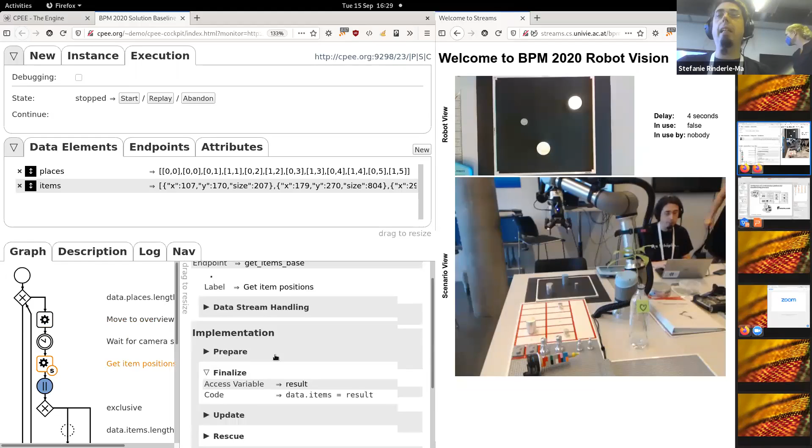As you can see here, this is a task with this script in it, and it's actually rather simple. You have this finalize thing here, and the whole result is available in a variable called result, and we just say data.items is result, and then you can see it up here in the data elements in the items.

It showed up as soon as we started the execution. And here you can see that it detected several of these items. So these are basically the predicted positions of these items. The thing I'm using here is a clustering approach, so you can see basically the centroid of the cluster and the size of the cluster in pixels, which is very simple. And it should have predicted 3 parts.

So we have stopped here in the middle of the process, which in itself is a little bit of runtime adaptation. We could of course always move back, but I think we will continue to this point and let the robot run its course through this operation.

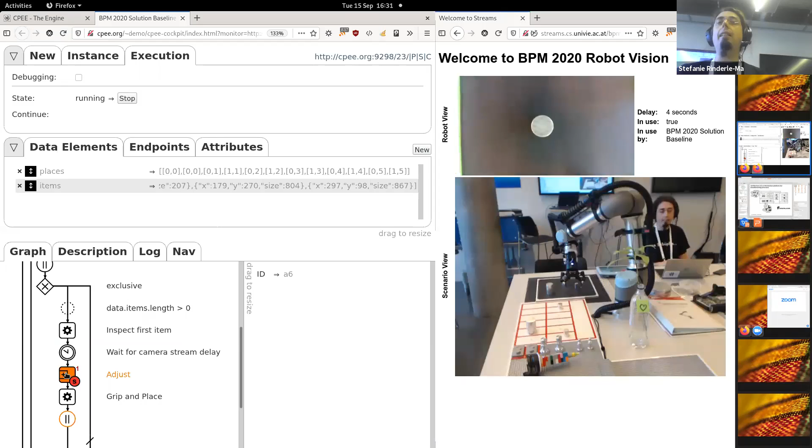So what we now do is we take the first of these items and inspect it closely. The first of these items, with the 4-second delay, is this little cylinder that is there. So now we started a sub process called adjust.

A sub process is just another endpoint which is called sub process, and it has some parameters where a process, which is coincidentally just lying on the server as a URL, is started, and then afterwards we do the Grip and Place. So we took the cylinder and we put it on this first thing.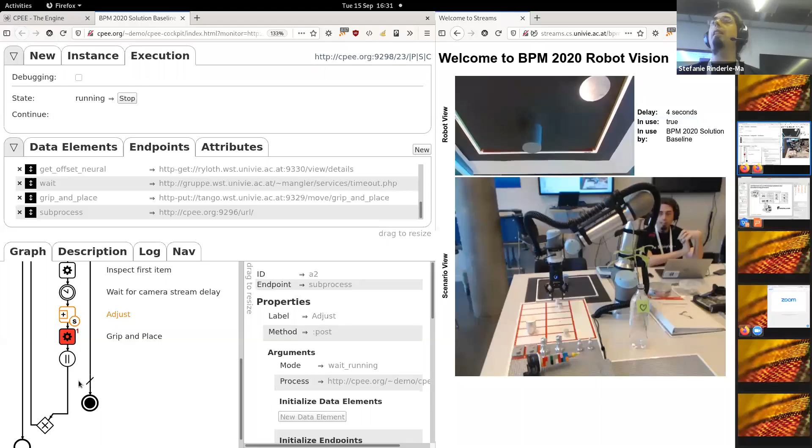Now you can see the robot is moving down very slowly because we are now making use of its sensors. So it's putting it down very slowly, and as soon as it touches something, it lets go and moves back to the initial position.

So an important lesson here is when you do this modeling, if you want that your process model lives also inside a company, this is not business process modeling in the strict sense. Of course this modeling would probably be done by somebody with some technical knowledge, but nonetheless it would be a person who sometimes wants to change something.

And at the very lowest level, of course, you have an implementation of all of these tasks that do something. So thinking about the granularity, what task does what, so that I can easily change the process without introducing many errors, is of course a challenge that is still a valid one.

So in this case, in order for you guys, if you want to use the robot, to not introduce any crashes, I decided that every move operation of the robot basically always goes back to a safe place, so that you can't drive the robot into the table or into the robot itself. Because the most critical thing is that the robot hits itself, and stuff like this. So I restricted basically the movement.

So for a final thing, I would say we pick up another one of these cylinders, maybe a big one, and put it down. And then I think the tutorial is already coming to a close, and we will break out into another room.

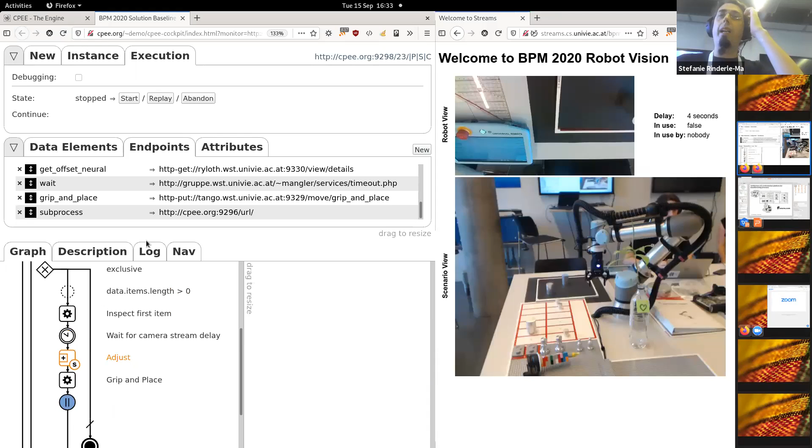So if we continue doing this, you can see again the robot moving into the overview position. And when you watch here the items, we only have 2 items left on the table. So it takes again the first one, and inspects it closer.

And while the adjust is executed, if you look very closely, you can see the cylinder move into the middle. Because we are trying to position the gripper as precisely as possible so that we can actually grip the thing.

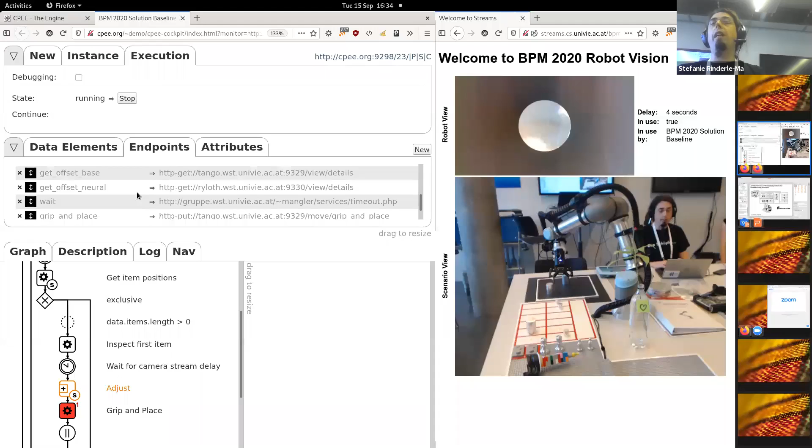In the endpoints, you can see that we have two kinds of endpoints, ones that are called base and ones that are called neural. The base ones are basically based on clustering, whereas the neural ones use a neural network for object detection.

So as you can see, we very elegantly placed one of the cylinders on top of the other. You should probably, if you try it out yourself, not put another one on it, or you will probably throw it off the table.

Which would be... Jürgen, I'm going to interrupt here. I think it's nice that you already mentioned the opportunity for people to stick around, but maybe for the people, because in 10 minutes we will start with a new element of the program, it's good to do a wrap up now, and then mention that people can stay around if they want to proceed and discuss. Is that okay? So he said we should do a short wrap up and then tell people they can stick around.

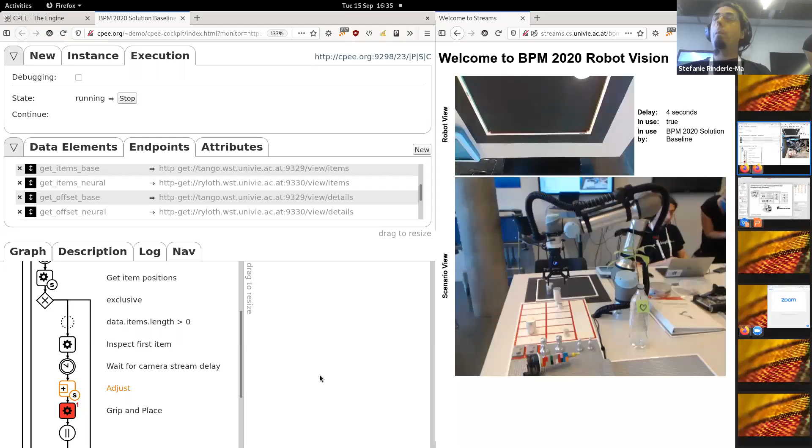So in order to wrap this up, the challenges of integrating, or having a high integration from the ERP level down to the machine level, are the same ones we've known for many years. But of course there is always the main goal to make it very simple and very approachable for actual customers or normal people who use it. So that is what we're trying to do here.

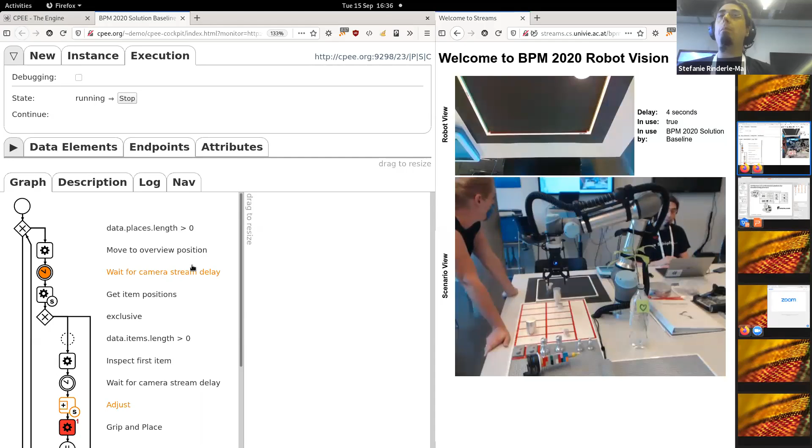If you want to stick around, you can play with this. I will stay here and put the cylinders back on. I'll support you in modeling. We'll also let other people stream their desktop so I can give feedback as they do modeling. We can explore more detail on various solutions — we have neural network solutions, examples with a 3D camera, various approaches we've done here. If you'd like to stick around, you can do so. And otherwise, have a nice evening.

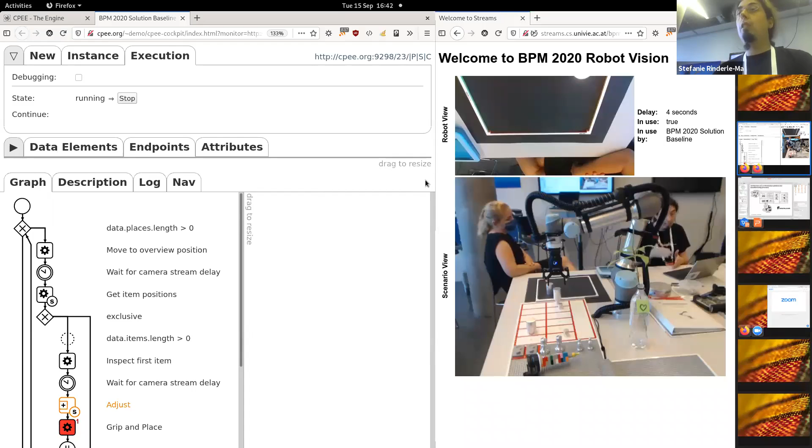So what we are doing is giving them some kind of plan that they have to produce certain static programs, like drive to the homing point, drive to an overview point, do a relative movement inside some bounds, and the rest is done through the process modeling.

And what is also an important step for safety is that the robot can never start a program when he's not at a certain point. So we are always looking at the end position of a certain robot, and he can only continue to work when the next program that is started is also within a certain range or connected with certain rules to this end position of the program.

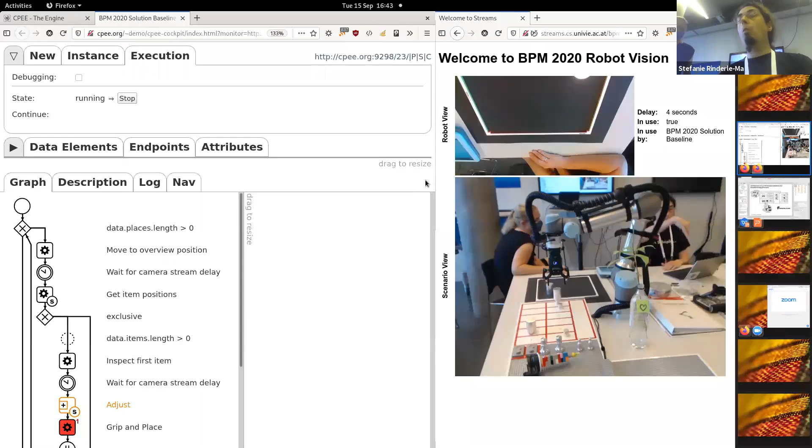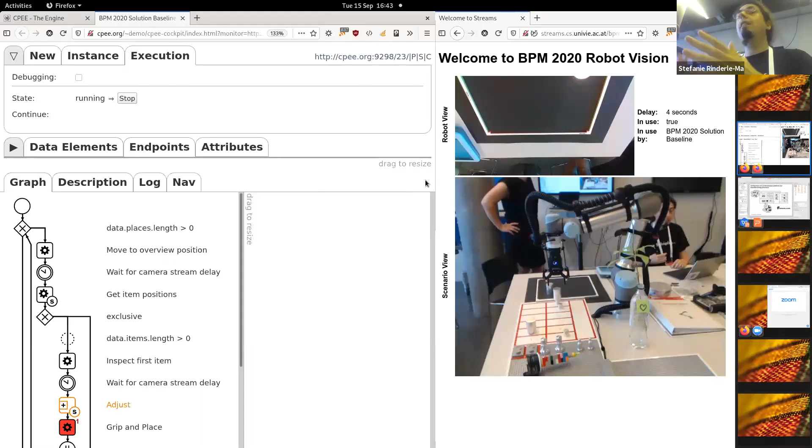This lets us split up the robot programs and make robot programming much simpler, bringing it down to a level where it can be easily modified and used as a tool, and not like a magic thing that I create once and then never touch again, because everything is very unapproachable.

Okay, very good. Thank you. Did that answer your question, Konstantinos? Yes, thanks. There was one more question, but the person asking has already left the session, so I'll leave it up to him to contact you again if he wants to hear more about it.

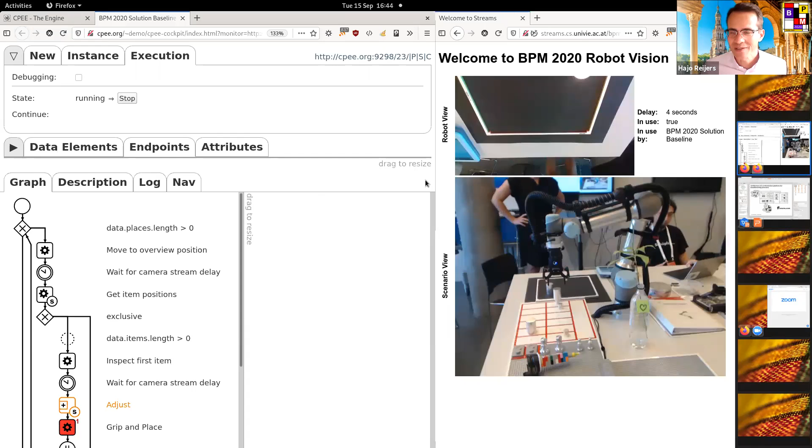Are there perhaps any other questions from the audience still? I think Stephanie had another remark. Okay, go ahead, follow up for the last question.

I just wanted to add that, for the complexity question, we make use of these sub-processes and super-processes to tame, let's say, the complexity of the process models.